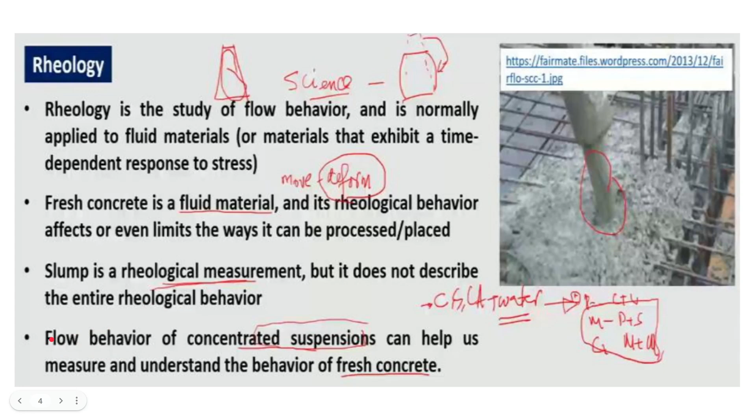And the flow behavior of concentrated suspensions can help us measure and understand the behavior of fresh concrete. So we have to study various aspects such as suspensions and various other parameters such as strain to find out the behavior of flow, as you can see in this picture. So how to measure the flow?

Flow is typically measured using shear parameters of stress and strain rate, which are normally obtained from the direct measurements of torque and flow rate in rheometers. So to study the flow behavior or the rheology, the instrument we use is the rheometer. It gives us various shear parameters such as stress and strain rate. Stress can be found out using the torque, and strain rate can be obtained from velocity and various other parameters.

So viscosity is the representative parameter used to assess the flow behavior and is defined as the ratio of stress to strain rate. We have to see this is not strain but strain rate. So this is viscosity, unlike elastic modulus, which gives us the ratio of stress to strain in solids. Here the viscosity gives the ratio of stress to strain rate.

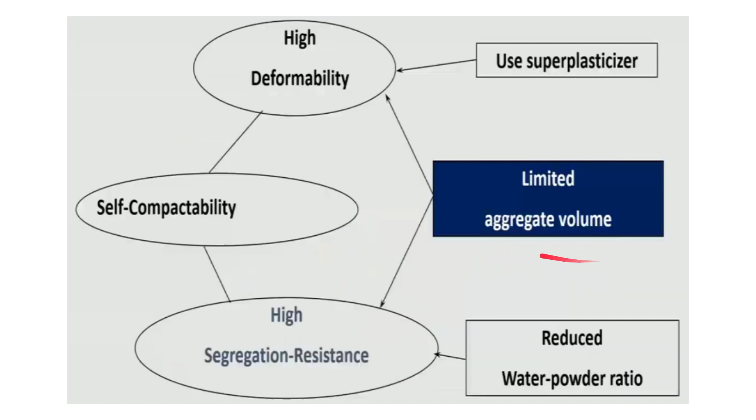So in the last class we studied self-compacting concrete. There we found that for SCC we need both high deformability and high segregation resistance. For high deformability we use superplasticizer, and for high segregation resistance we use reduced water powder ratio. Using both we can obtain the concept of SCC. And for that we need a limited amount of aggregate volume. This is a very important parameter.

So coarse aggregate in concrete is simulated by the large sand particles in this case, and the concept can therefore be extended to concrete. So we need to study blocking tendency, especially near the bars, because there the hole diameter is very low because of lack of space. There are also a few important terms such as water retention.

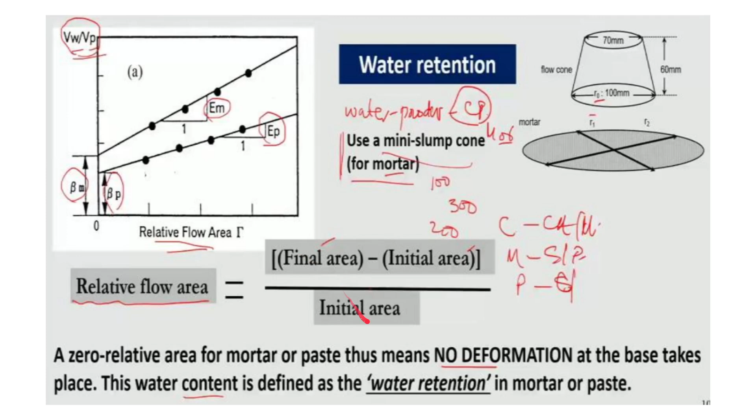That means in the case of zero relative area for mortar or paste, there is no deformation at the base, because the final area and initial area are the same. At this condition, the water content is defined as the water retention in mortar paste. So the maximum water content possible where there is no deformation is called the water retention. They have coined various parameters based on this relative flow area and volume of water and paste. So, the flow behavior of suspension.

Suspension, as we might have discussed, is basically solid particles which are dispersed or flocculated in liquids. They can be either scattered, dispersed, or combined or aggregated in a flocculated manner. So the key factors affecting the flow behavior of suspension are basically two. One is the volume of solid particles, which is termed as Vs, and the second is degree of agglomeration or

flocculation. Vs, the solid particle volume, its increase causes the increase in viscosity, so that's why it is an important factor. The degree of agglomeration or flocculation is mainly caused by interparticle forces. Other influencing factors of flow behavior are temperature and pressure. Liquids with higher viscosities generally have greater temperature sensitivity, and viscosity increases with the increase in pressure, though the changes are minimal at atmospheric pressure.

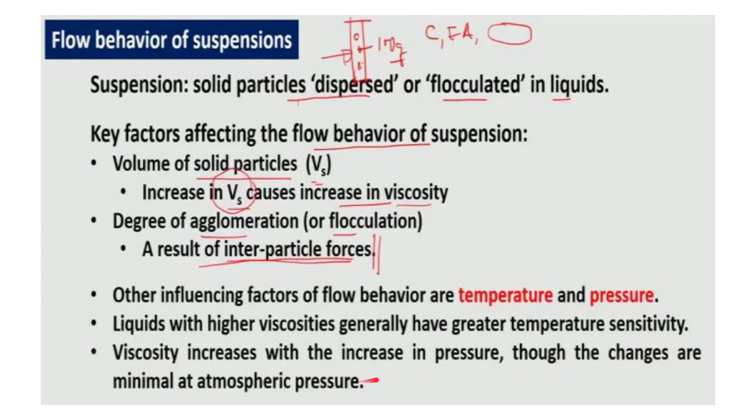Now what are the various types of flow behavior which can be observed? Basically four types of flow behavior have been observed. One is Newtonian, one is Bingham plastic, and both are linear. The Newtonian does not have any initial stress, so it starts from zero, the origin, whereas the Bingham plastic has some initial stress present, so it starts from some value tau naught. In the case of shear thinning, that is pseudoplastic, with the increase in strain rate, the increase in stress decreases. That's why the viscosity decreases and it becomes plastic in nature.

Whereas in the case of shear thickening, with the increase of strain rate, the amount of stress required also increases. So that's why it thickens, so more capacity is required.

So for basic constitutive relations for plastic behavior, these four types of stress-strain rate behavior are obtained for flow. The Bingham model can be modeled as tau equal to tau naught plus eta p gamma dot. For the pseudoplastic power law model, that is shear thinning, tau is equal to k gamma dot to the power n, where tau naught is the initial yield stress, k is the consistency, n is the power index, eta p is the plastic viscosity, and gamma dot is the rate of shear strain.

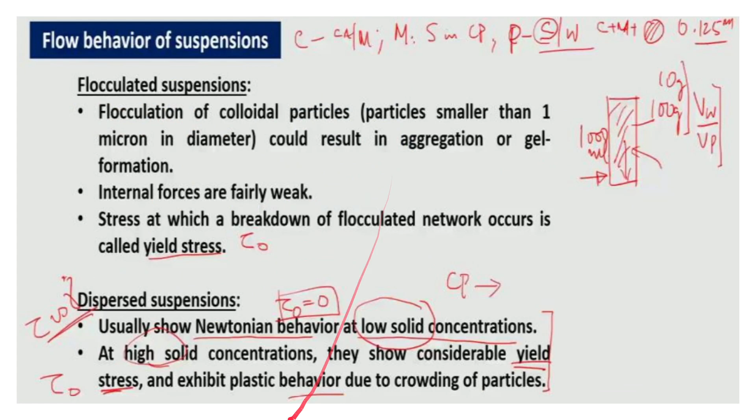So the assessment of flow behavior is normally done using shear rheometers. These are instruments which operate in rotation and measure the torque and rotational speed. There are many types of rheometers, as we will see later, but primarily two fundamental types: the coaxial cylinders and the parallel plates. The sample sits between, and one of the cylinders or plates rotates. Rheometers either control the stress and measure strain rate, or control the strain rate and measure stress.

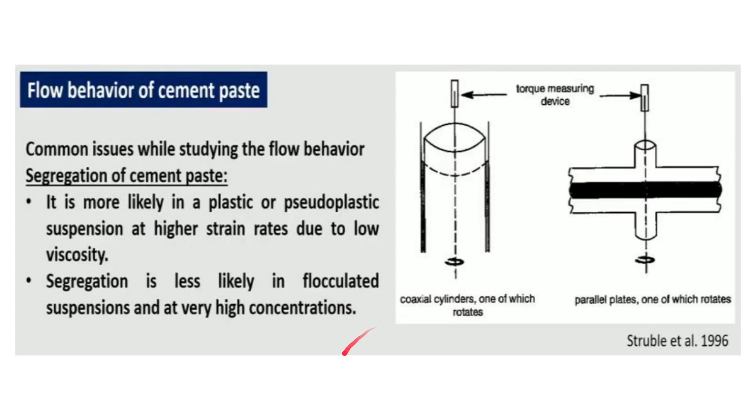So when dispersed using a superplasticizer, cement paste shows Newtonian behavior at low concentrations and plastic behavior at high concentrations. That is what we studied in the last slide here. So in dispersed form, they exhibit Newtonian behavior at low concentration and plastic behavior at high concentration, and it has been found based on experiments by Struble.

So while assessing the flow behavior, there could be some hysteresis in the stress when strain rate is increased from 0 to higher values and brought back to 0 after reaching the peak. This reflects the lack of equilibrium between the microstructure and strain rate, and denotes that the material is undergoing irreversible structural breakdown due to shear.

So because of this hysteresis behavior, it is not coming back to its original shape, and that means some irreversible structural breakdown might have occurred because of the presence of shear. That is the reason why the hysteresis occurs.

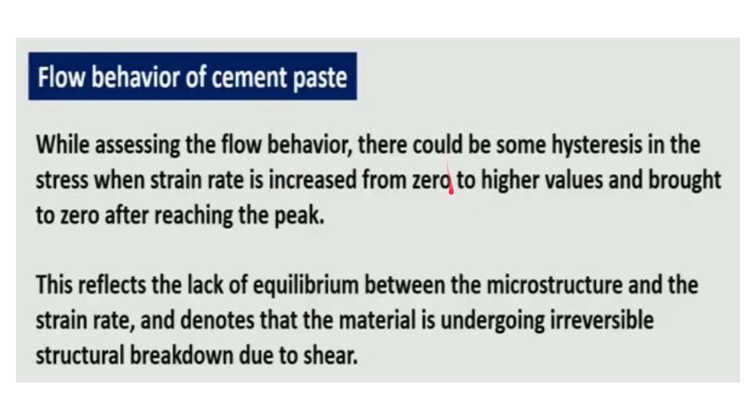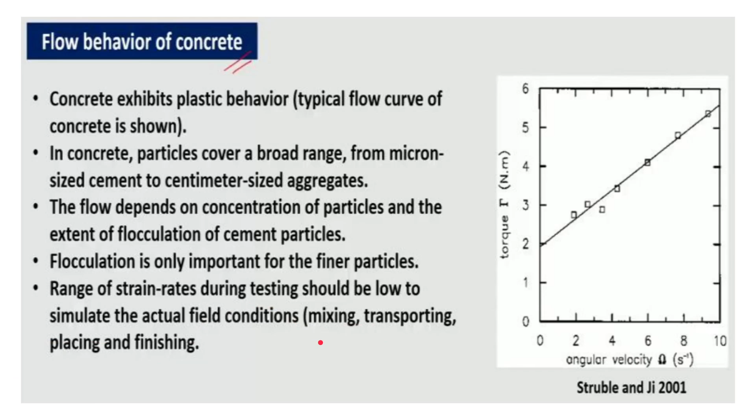The range of strain rates during testing should be low to simulate the actual field conditions, which may occur in mixing, transporting, placement, and finishing. So these are some of the conditions to be noted. Flow behavior must be described using the yield stress and the plastic viscosity due to the Bingham nature. Coarser particles tend to settle due to gravity, and segregation is more likely to happen during shear.

So these factors will occur, and we have to keep them in mind. Slip near the wall of the rheometer could be aggravated due to the larger gap, which is necessary because of coarser particles. So these factors need to be kept in mind.

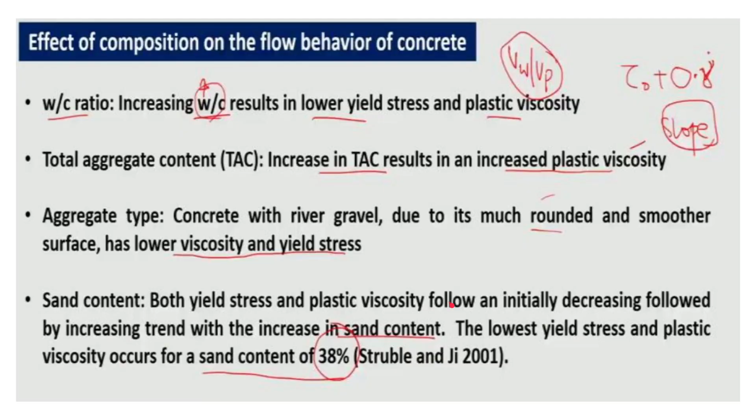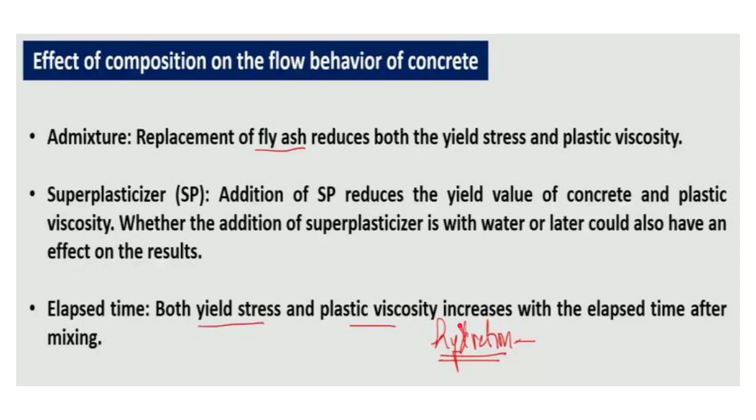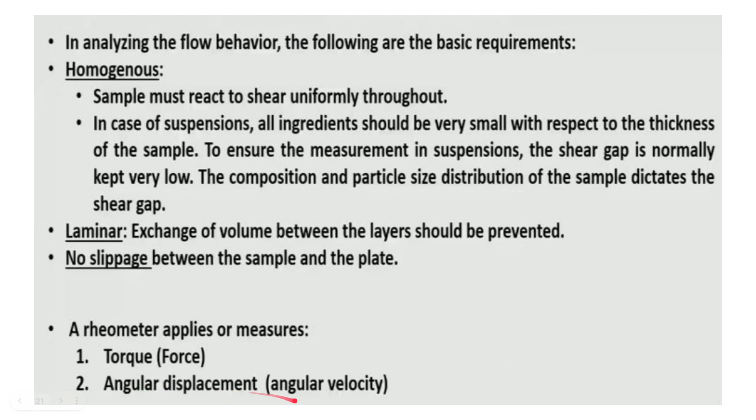And the rheometer basically applies or measures these two. It will either apply torque or force and measure the angular displacement or angular velocity, that is the strain rate, and viscosity, or it will apply the angular displacement or angular velocity and measure the torque or force. So one has to be found using the other.

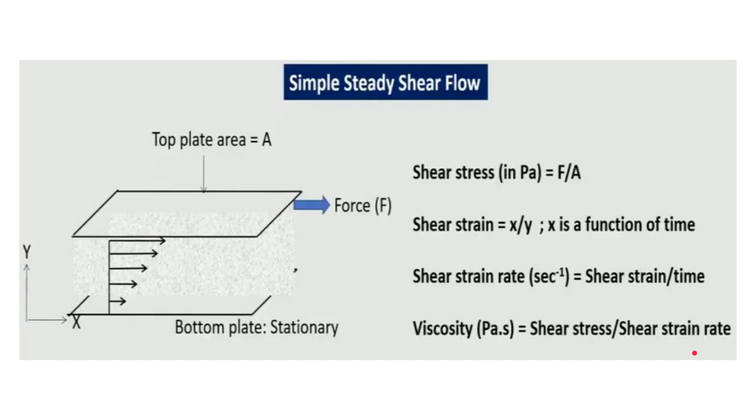Okay, so viscosity is basically shear stress by shear strain rate. Now let us see the torsion flow in parallel plates case.

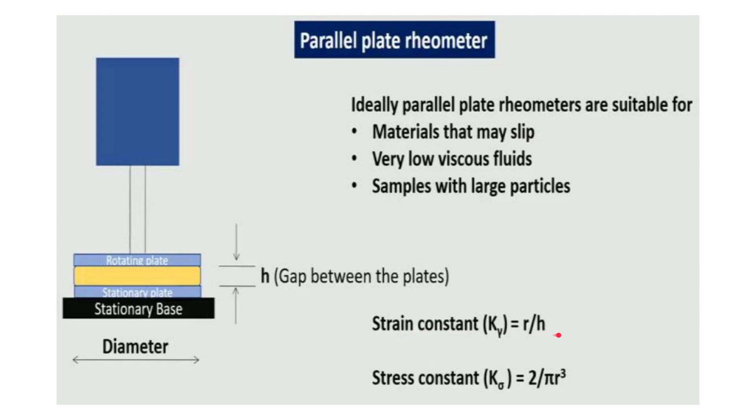Parallel plate rheometers are ideally suitable for materials that may slip, or very low viscous fluids. It can travel fast, and samples with large particles will not have that much problem. So strain constant k gamma is equal to r by h, and stress constant k sigma is equal to 2 by pi r cube.

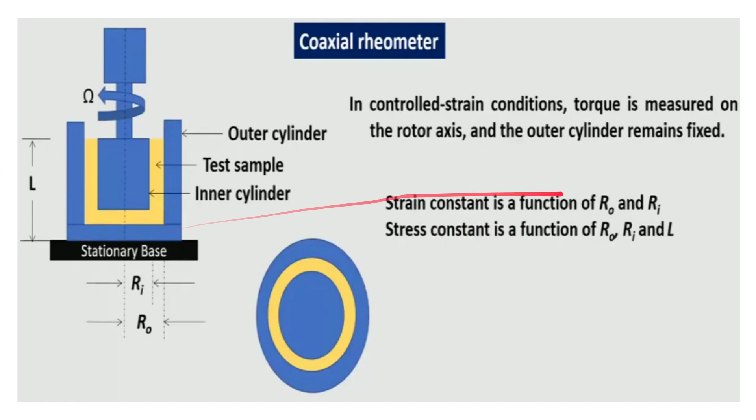This is a stationary base. In control strain conditions, torque is measured on the rotor axis, and the outer cylinder remains fixed. Strain constant is a function of r naught and ri. Stress constant is a function of r naught, ri, and L. So stress takes into account L, the length of cylinder, whereas strain is only r naught and ri. So this is the concept.

Different rheometers exist for testing fresh concrete and mortar. They can be coaxial cylinder type Tattersall apparatus, BML viscometer, BTRHEOM rheometer. These are some of the types of rheometers which are generally used for fresh concrete and mortar testing. We shall go very briefly about them in the coming slides.

Coaxial cylinder type, as we know, is similar in principle to that described in the flow of paste. The tendency of segregation, slip and plug flow are the issues, especially in low viscous concretes.

Typically the gap between the inner and outer cylinder in a coaxial cylinder rheometer must be large compared to the maximum particle size, so that the particle can flow, and it must be small compared to the diameter of the inner cylinder, so that there is no issue of deformation of the machine. If it is too small, then there might be deformation due to the amount of flow.

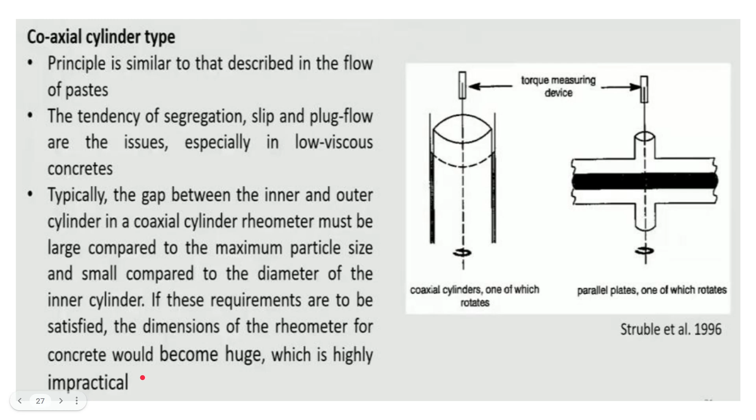So if these requirements are to be satisfied, the dimensions of the rheometer for concrete would become huge, which is highly impractical. So this is one of its anomalies or drawbacks.

Next, let us come to the Tattersall apparatus. This is designed to reduce the tendency of segregation. As you can see, the helical impeller has a vertical axis and rotates in a cylindrical container of fresh concrete having the same axis. Blades reduce the segregation.

Torque gamma exerted on the helical impeller and its angular velocity omega are measured. Stress and strain rate are not directly measured. From the flow curve, two parameters are obtained by linear regression: G, in Newton into meter, and H, in Newton into meter into second, which are analogous to yield value and viscosity respectively.

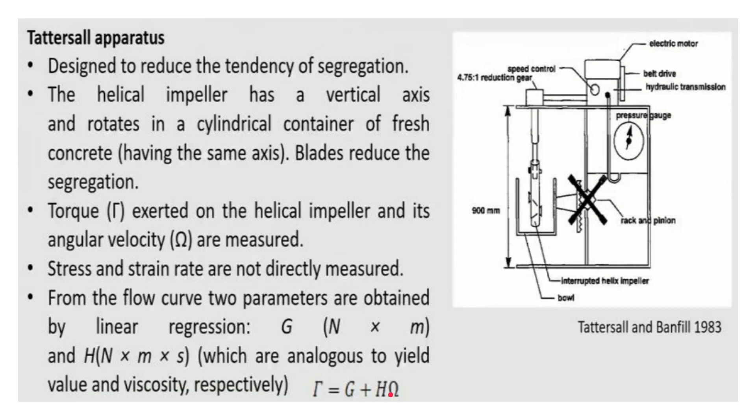So the equation comes to be gamma equal to G plus H omega.

In the case of BML viscometer, this is a coaxial type with vanes on inner and outer cylinder. The equipment measures the torque tau produced on the stationary inner cylinder while the outer cylinder is rotating at various speeds omega. Ribs eliminate the slip between the inner cylinder and concrete.

Changing the measuring speed and the measuring torque are fully computerized and automated. By comparing the torque at a given speed in the first registration sequence and the torque at the same speed but in another registration sequence, the computer assesses whether the concrete is prone to segregation.

So basically, if the speed is constant, the torque should also be constant. But after changing the registration sequence, if the torque gets changed for the same speed, mainly if it has become low, that means segregation has occurred in concrete. So using that, we can check whether the concrete is prone to segregation. That is the use of the BML viscometer.

And lastly, let us go to the BTRHEOM viscometer. It is basically a rotational rheometer that utilizes a parallel plate geometry. Both the plates are vaned, so slip and plug flow are controlled.

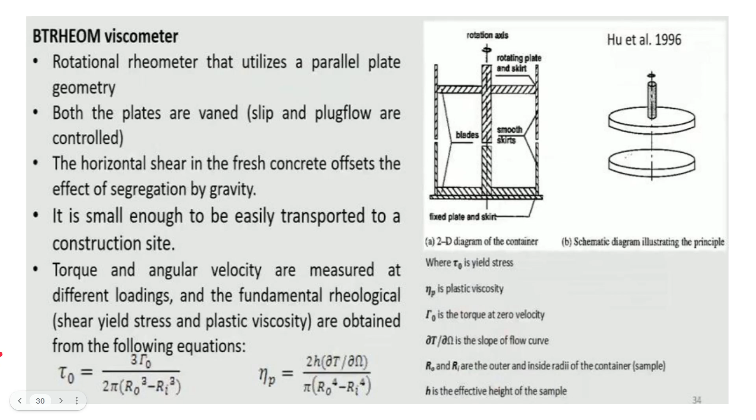With this, we have briefly gone through rheology. This much is sufficient for our purpose. For more, you can go through various books and literature and find out in-depth detail about these techniques.

So now let us go to one special type of concrete, the fiber reinforced concrete. So development of fiber reinforced concrete, or FRC as it is termed.

FRC is the acronym of fiber reinforced concrete. It attempts to address the following two deficiencies of cement based composites: one is relatively low tensile strength, and second is low energy consumption capacity, which is also called toughness.

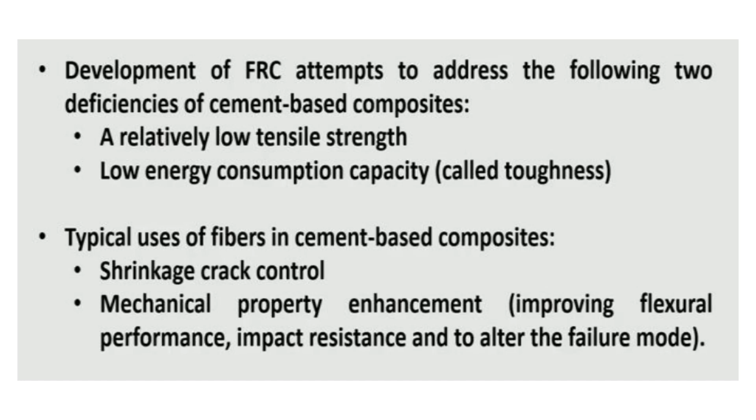This typically uses fibers in cement based composites for shrinkage, crack control, mechanical property enhancement, improving flexural performance, impact resistance, and altering the failure mode.

So in the case of matrix concrete, two types of fibers can be used: one is continuous fibers, which are straight lines, and one is discrete short fibers, which are in random directions.

If you compare fiber reinforcement and conventional reinforcement, fibers are generally distributed throughout concrete, whereas reinforcing bars or wires are placed only in predetermined locations. Fibers are relatively short, discrete, closely spaced, and randomly distributed throughout the matrix. Presence of fibers in concrete modifies the properties of concrete per se.

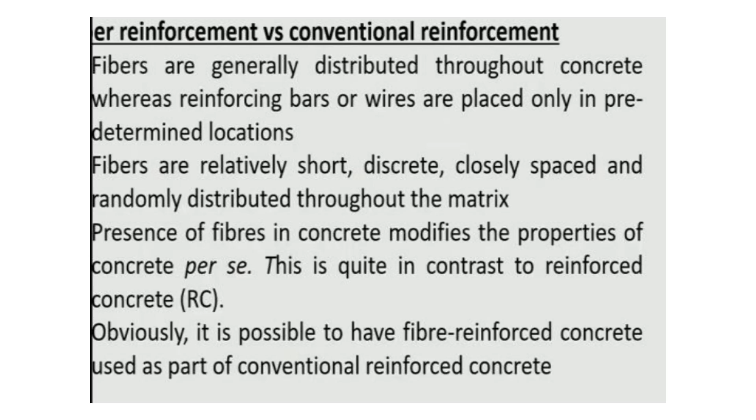This is quite in contrast to reinforced concrete, RC. Obviously, it is possible to have fiber reinforced concrete used as a part of conventional reinforced concrete. So these are the advantages of fiber reinforcement over conventional reinforcement.

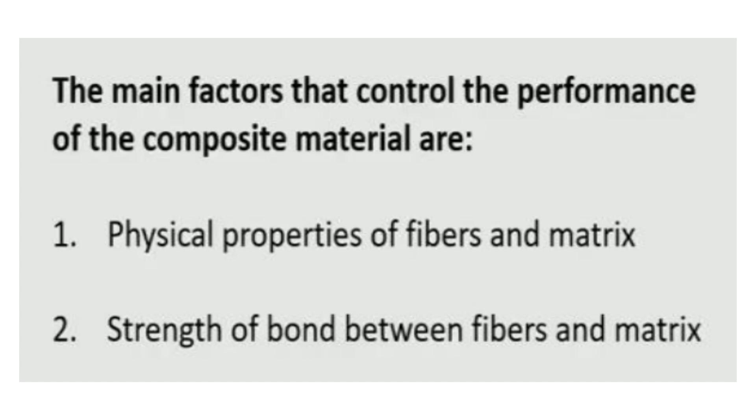The main factors that control the performance of the composite material are basically the physical properties of fibers and the matrix, and secondly the bond strength between fibers and matrix. These two properties are the main factors which control the performance of composite material, and for this we have developed a term called fiber volume ratio.

The fiber volume ratio is basically the ratio between fiber volume and the total volume of FRC. At a low fiber volume, the addition of fibers contribute mainly to the toughness, and at a high VF (fiber volume), the tensile strength of matrix can be enhanced and the failure mode can be changed.

These are the ways of using fiber reinforced concrete and its various applications. The properties of the matrix influence the bond with the fibers and the mechanical properties of FRC. FRC can be modified using mineral admixtures such as fly ash, slag, silica fume, metakaolin, etc. This increases its applicability.

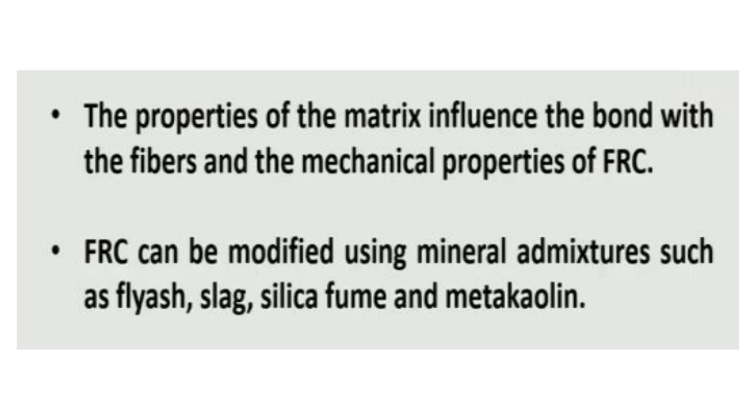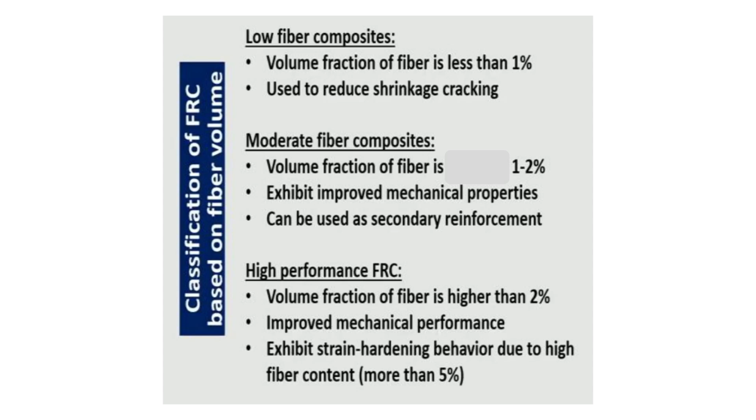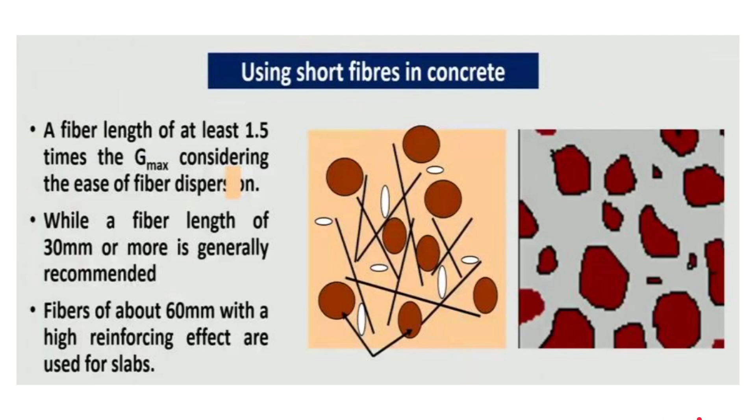Using short fibers in concrete, a fiber length of at least 1.5 times the maximum size of aggregate can be used, considering ease of fiber dispersion, while a fiber length of 30 millimeters or more is generally recommended. Fibers of about 60 mm with a high reinforcing effect are used for slabs. These are criteria for how short fibers can be used.

So what are the types of fibers? Fibers can be made from steel, plastic, glass, natural materials such as wood, cellulose, etc. They are available in a variety of shapes, sizes, and thicknesses. They may be round, flat, crimped, and deformed. The steel, glass, synthetic, and natural fibers with different lengths and shapes have been shown here in this figure.

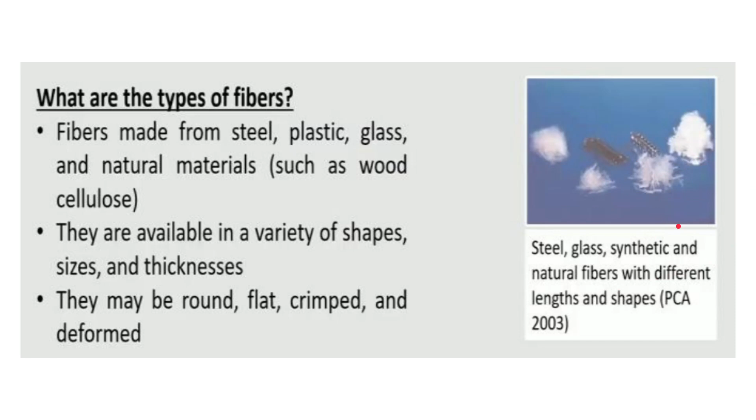They may be round, flat, crimped, deformed, with a variety of shapes, sizes, and thicknesses. These are some examples of typical fibers: this is a steel fiber, these are polyethylene fibers. Various types of fibers are shown here.

The characteristics of commonly used fibers: the diameter D is between 0.05 to 0.5 millimeter. The length L is basically from 5 to 60 millimeter, and the aspect ratio, that is L by D, is around 100. These are some of the characteristics of commonly used fibers.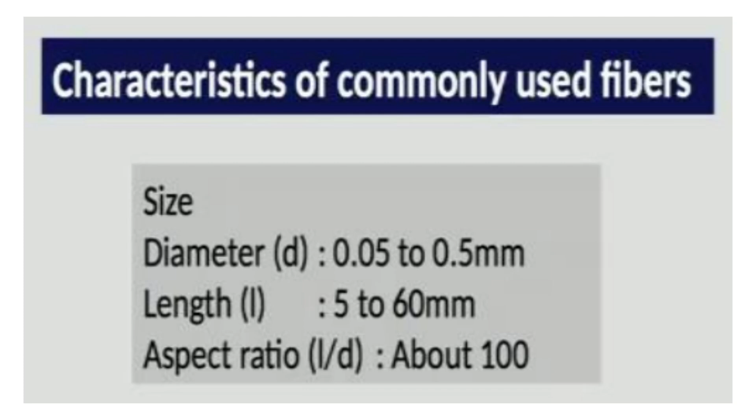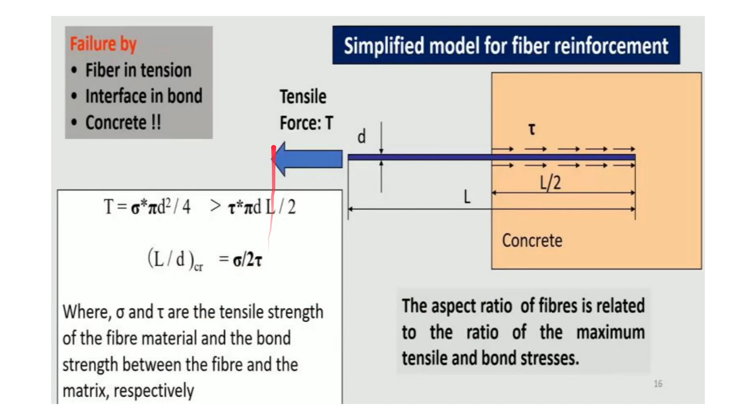So more is the aspect ratio, more is the tensile force. More is the tensile force given, greater will be the aspect ratio. Also higher will be the bond stress, lesser will be the aspect ratio. So that's why the critical aspect ratio is mainly dependent on the bond stress as well as the tensile force.

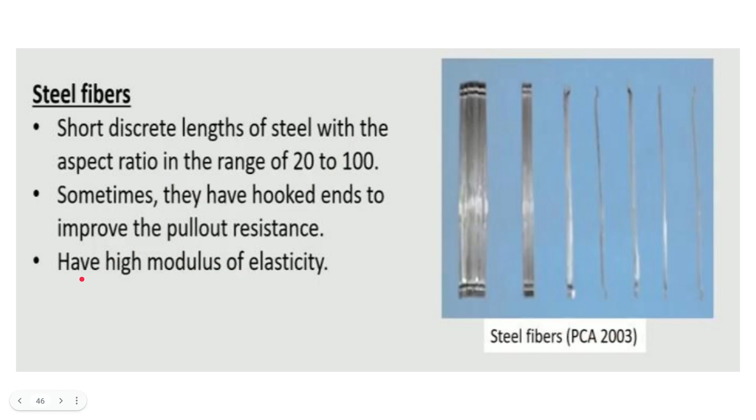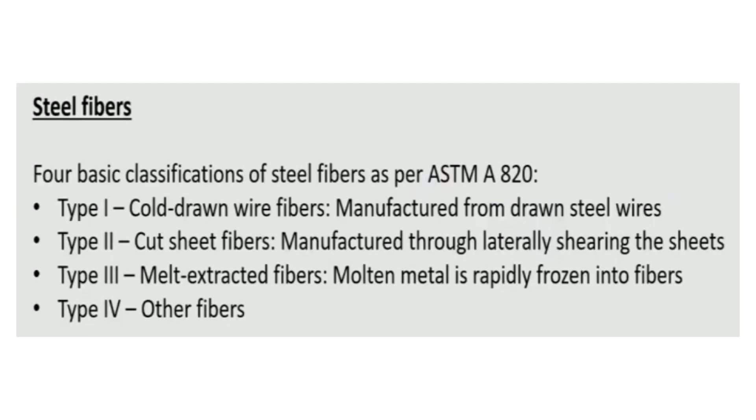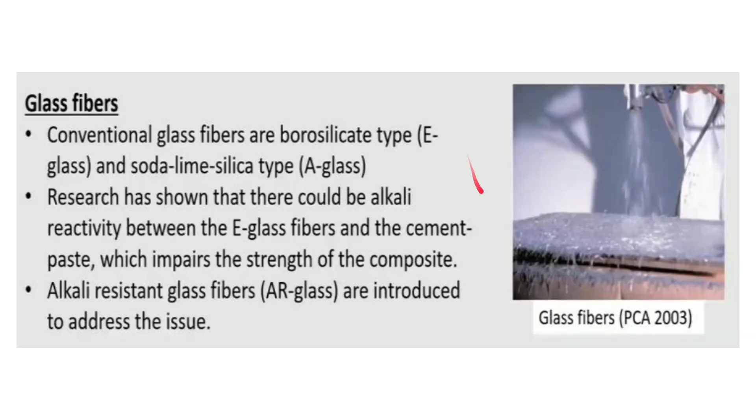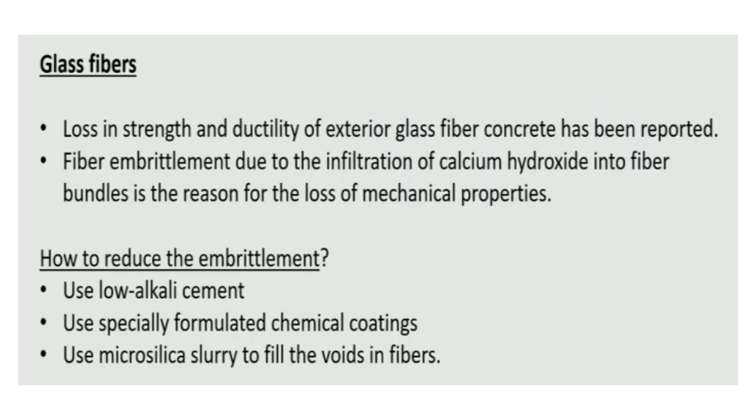So it has been found that glass fibers result in loss in strength and ductility over time, and that is basically because of fiber embrittlement due to the infiltration of calcium hydroxide into fiber bundles, which results in loss of mechanical properties. This reduction in mechanical properties due to embrittlement can be decreased to a great extent by using low alkali cement, specially formulated chemical coatings, microsilica slurry for filling the voids in fibers, etc.

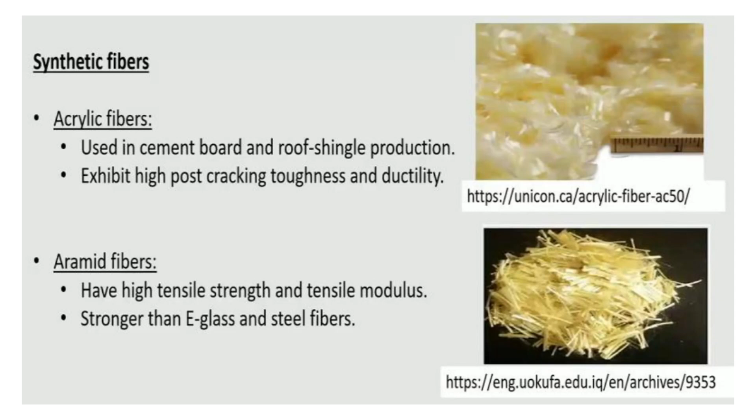They exhibit high post-cracking toughness and ductility. In case of aramid fibers, they have high tensile strength and tensile modulus. They are stronger than E-glass and steel fibers. So these are some of the characteristics of the aramid fibers. Then

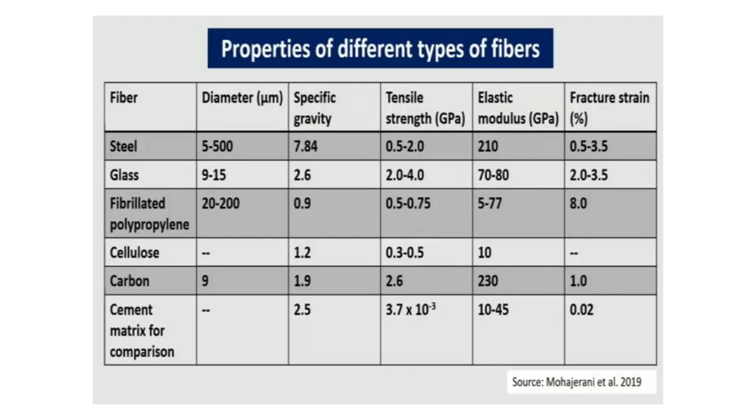So then let us come to properties of different types of fibers. As you can see, these are the various fibers and the various parameters they have given here based on literature. So now let us go into the durability of fibers in concrete.

As we all know, the steel is protected from corrosion through the formation of an oxidation film on the steel surface, which has a high pH. This film prevents the steel from coming in direct contact with water and air, and hence steel fibers do not corrode, which is very obvious and very trivial.

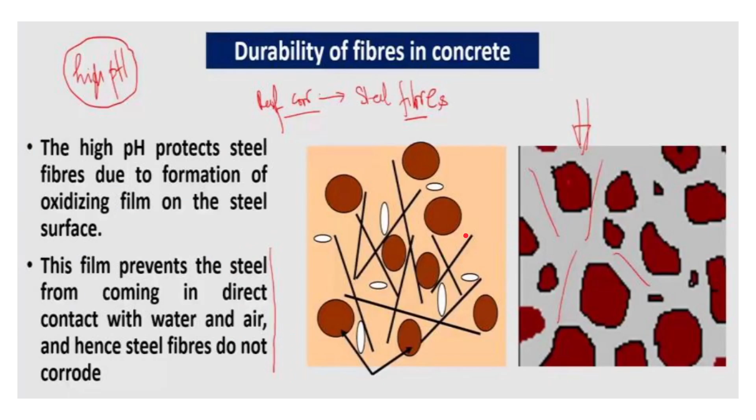So in steel fiber reinforced concrete, addition of fibers reduces the workability of concrete. That is one of its drawbacks. So for the same consistency, cement content, water content, and sand to aggregate ratio all need to be increased compared to plain concrete. It hampers mixing, transportation, placing, and consolidation. So that has to be kept in mind because it hampers all.

The coefficient of variation of compressive strength is similar to that of normal concrete. Compressive and tensile strengths do not change much with the fiber content. So that is also one of the parameters.

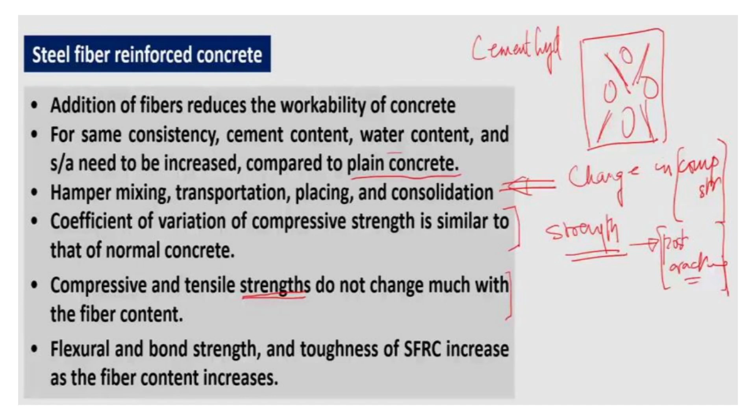And flexural and bond strength and toughness of SFRC also increase as the fiber content increases. All those values increase in the case of steel fiber reinforced concrete as the amount of fiber content increases. The mix should be cohesive enough to hold the fibers without segregation.

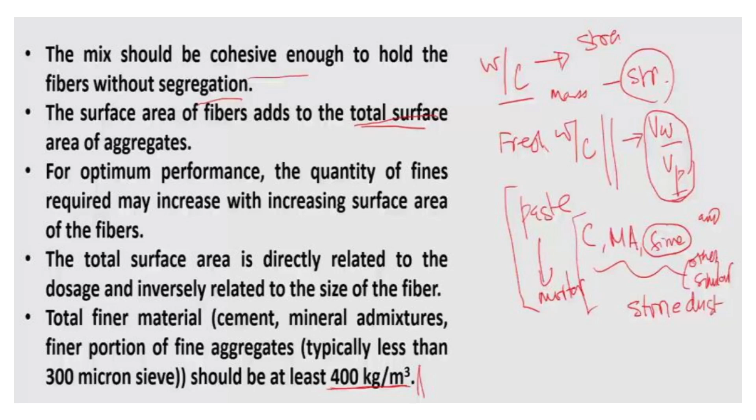The surface area of fibers adds to the total surface area of aggregates. For optimum performance, the quantity of fines required may increase with increasing surface area of the fibers. The total surface area is directly related to the dosage and inversely related to the size of the fiber. And total finer material, cement, mineral admixtures, and the finer portion of fine aggregates, typically less than the 300 micron sieve, should be at least 400 kg per meter cube. So these are some of the criteria which have to be used.

For the mix to be efficient for the fibers, the grading curve, that is the graph of sieve size and percentage passing of aggregates, coarse and fine together, should be polarized towards the finer side in order to increase the carrying capacity. The combined grading curve of coarse and fine aggregates down to 75 micron size should be checked for getting smooth grading. It is preferable to use natural fine aggregate. If it is not available, the available fine aggregate can be modified by combining crushed sand or mixing a small percentage, about 4 to 8% of crusher fines, to improve the continuous grading.

As the number of fibers in a unit volume of concrete increases, the spacing between the fibers reduces. That is obvious. This poses a limit on the maximum size of coarse aggregate and its percentage fraction in the mix. The maximum size of aggregate and the proportion of coarse aggregate may suitably be reduced depending on the dosage and diameter of fiber.

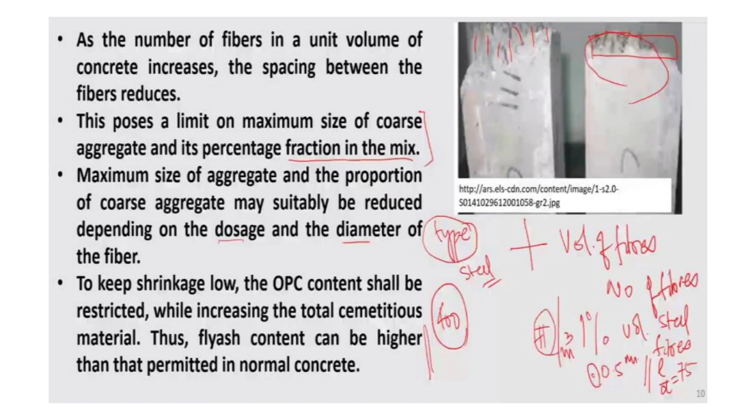For keeping the shrinkage low, the OPC content should be restricted while increasing the total cementitious material. Thus, fly ash content can be higher than that permitted in normal concrete. So these are other factors that need to be kept in mind. Keep water content to a minimum. Water demand increases linearly with fiber content.

For each fiber percent, an increment of as much as 20 kg per meter cube may be required. Water content shall normally be in the range of 140 to 180 kg per meter cube of concrete. To minimize water content, admixtures such as air entraining, water reducing, and high range water reducing admixtures may be used. Typical dosages of superplasticizer, naphthalene or melamine based, are in the range of 0.4 to 1.4% of cementitious content.

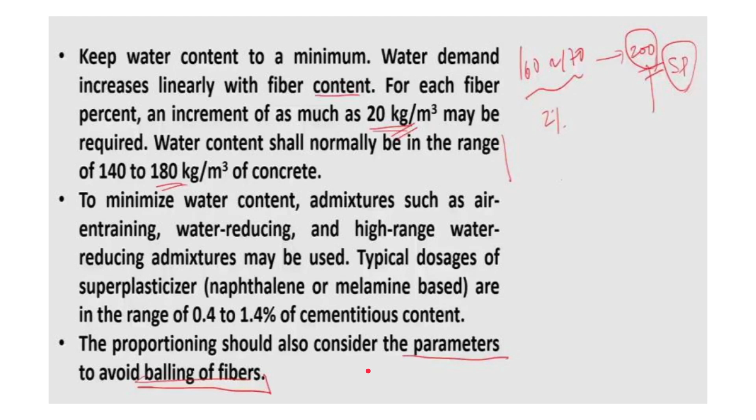So the shape, size, and content of steel fibers may be determined considering the required strength and deformation characteristics of the steel fiber reinforced concrete. A steel fiber reinforced concrete should be proportioned keeping the water content at a minimum while meeting the required performance in terms of workability, etc. High unit water content and sand aggregate ratio could induce bleeding and segregation, and would hamper mixing, transportation, placing, and consolidation.

So higher water content and sand aggregate ratio results in bleeding and segregation. So that is one of the issues. And if there is lower water content, then that will lead to improper hydration. So that is the other problem, and also it will not give proper workability. So both are issues. It has to be workable and also not result in bleeding and segregation.

So considerations for fiber length. It should be sufficiently long compared to the maximum aggregate size to have the desired effect. So it should be at least 1.5 times the maximum size of aggregates. It should be about 60 mm for high reinforcement effect for slabs. Sorry, a length of 30 mm or more is recommended generally.

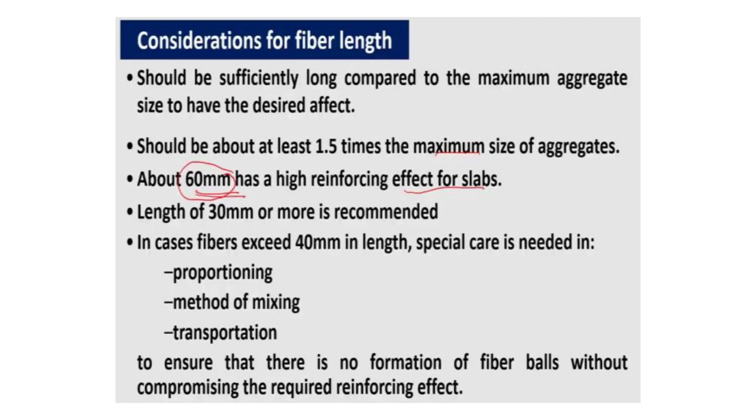In cases where fibers exceed 40 mm in length, special care is needed in proportioning, method of mixing, transportation, etc. to ensure that there is no formation of fiber balls without compromising the required reinforcing effect. If fiber content is between 0.5 to 2%, normal mixing methods may be used. The concrete should be thoroughly mixed to get a homogeneous uniform mix.

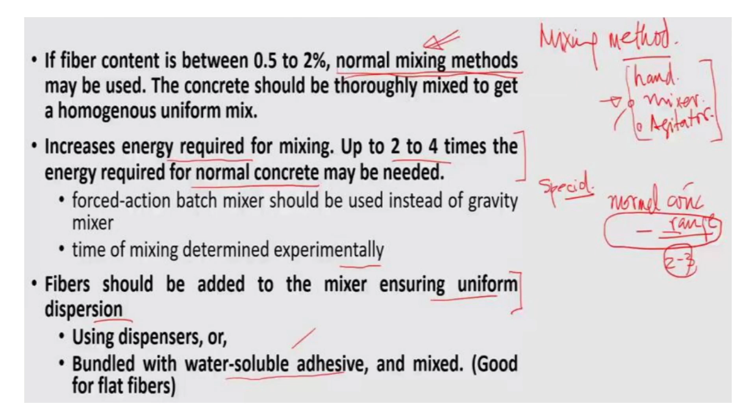Fibers should be added to the mixer ensuring uniform dispersion, using dispensers or bundled with water soluble adhesive and mixed, which is good for flat fibers basically. So all those techniques can be used. When fibers are added in an agitating truck, the concrete should be mixed at high speed. Mixing time for FRC can be 15 to 25% higher compared to concrete without fibers.

The variations in the proportions of coarse aggregate in a sample of known size denote the mixing efficiency in fiber reinforced concrete. For each FRC job, the optimum time for uniform mixing should be found by trials, and it may change with ingredients, especially fibers. Thus it should be checked very frequently.

So the mixing time will also change with the working rpm of the mixer and with wear of the blades, to ensure that the fibers do not form balls. We have to keep in mind that longer fibers have a greater tendency to wrap around lumps and form balls.

Chances of balling are higher with higher dosages of fibers, and also higher with higher aspect ratio. So more is the L by D ratio, more will be the balling, and also with higher dosage because of the increase in volume. So harsh mixes, not fluid enough or not workable enough, take longer time to mix the fibers without balling, okay.

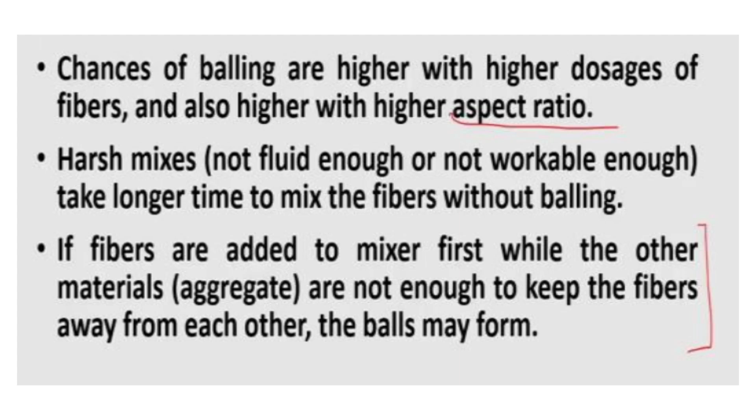So if the harsh mix basically is not fluid enough, it takes longer time for mixing, okay, and that's why without balling it will also take longer time. Also if the fibers are added to the mixer while the other materials are not enough to keep the fibers away from each other, okay, then also the balls may form. So we have to keep into account everything.

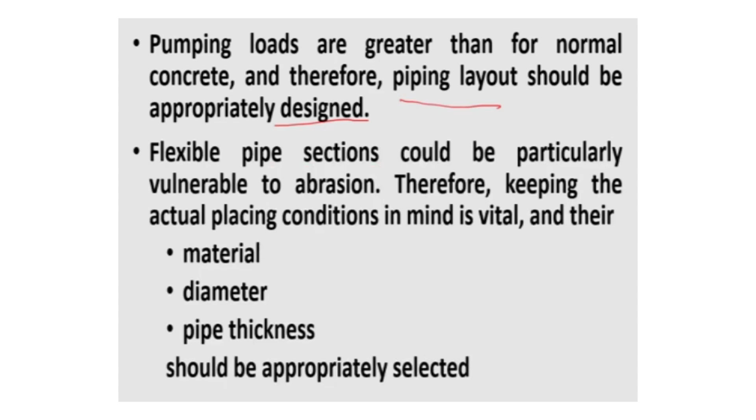So pumping loads are greater than for normal concrete because of the presence of steel fibers, and therefore the piping layout should be appropriately designed, okay. Flexible pipe sections could be particularly vulnerable to abrasion, okay. Therefore keeping the actual placing conditions in mind is vital, and their material, diameter, pipe thickness, all should be appropriately selected. Then only it will be useful, okay.

So checking the homogeneity of fiber dosage, okay. The content of fiber shall be checked from samples obtained from fresh concrete. Each fresh concrete sample will be placed over a 5 mm sieve and washed with water to remove the fine content. From the remaining mass of aggregates and fibers, the fibers are to be separated manually, dried, and weighed.

The average weight of fibers obtained is used to determine the nominal fiber dosage, which shall not be less than 90% of the specified fiber dosage. For steel fibers, a magnet or an electromagnet can be used to extract the fibers. The content of fibers can also be estimated in hardened concrete by taking cores and crushing them.

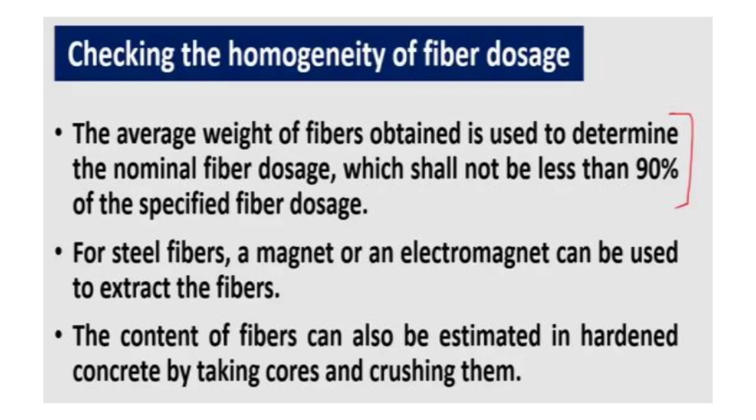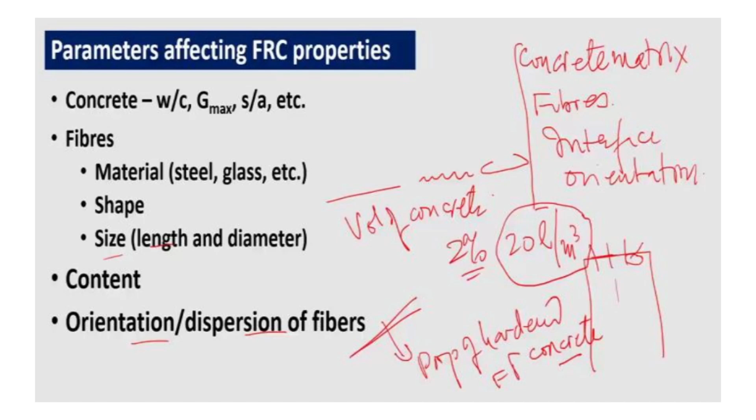So now let us see the parameters which affect the FRC properties. Concrete is mainly affected by water cement ratio, maximum size of aggregate, sand by aggregate, total aggregate content, etc. Fibers mainly depend on material, that is steel, glass; shape, size, aspect ratio; content, orientation, fiber dispersion, etc. So shape, size, and content of steel fibers are determined according to the required strength and deformation characteristics of SFRC.

Steel fibers are either mixed in the mixture with other materials or are sprayed or added at the end in the agitator truck. Shape and size: the length ranges between 20 and 60 mm. Diameter ranges between 0.3 and 0.9 mm. And the aspect ratio L to D ranges between 30 and 100. Fiber content ranges between 0.5% and 2.0% by volume, which is equivalent to 40 to 160 kg per meter cube by weight.

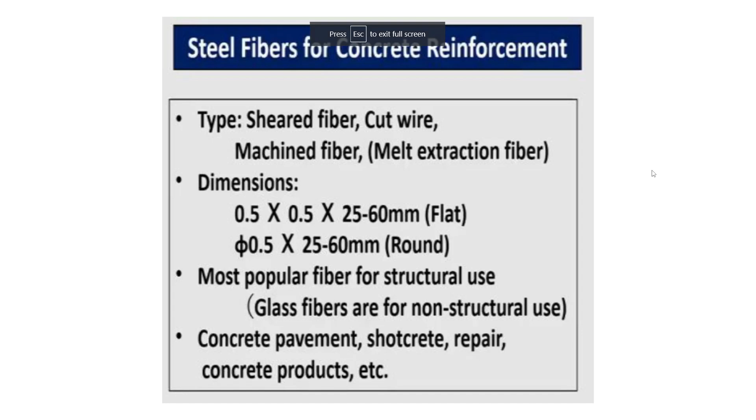Okay, so the steel fibers can be sheared fiber, cut wire, machined fiber, melt extraction fiber, etc. And the dimensions can basically be 0.5 by 0.5 by 25 to 60, flat. That is a square section, and this is length, so it is basically flat. And round, that has 0.5 diameter into 25 to 60 length.

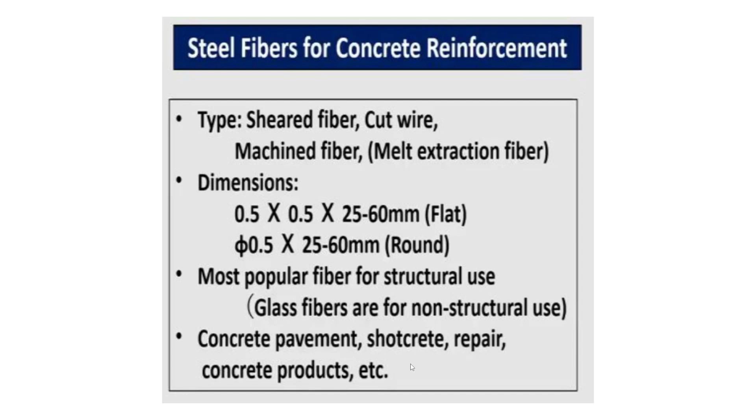So the most popular fiber for structural use is the steel fibers, as we discussed, and glass fibers are basically for non-structural use. Concrete pavement, shotcrete repair, concrete products, etc. are some of the applications. Properties of SFRC: in SFRC, the steel fibers may be assumed to carry tensile stresses only after cracking of the concrete phase. Thus the tensile strength of SFRC may be taken to be the cracking or tensile strength of the matrix concrete.

Addition of fibers may not lead to substantial increase in the compressive or tensile strength, though the post cracking behavior is a completely different story. So we have to take that. Whereas the flexural and bond strength and especially toughness of SFRC increase as the fiber content increases, the compressive and tensile strengths do not change considerably with the fiber content.

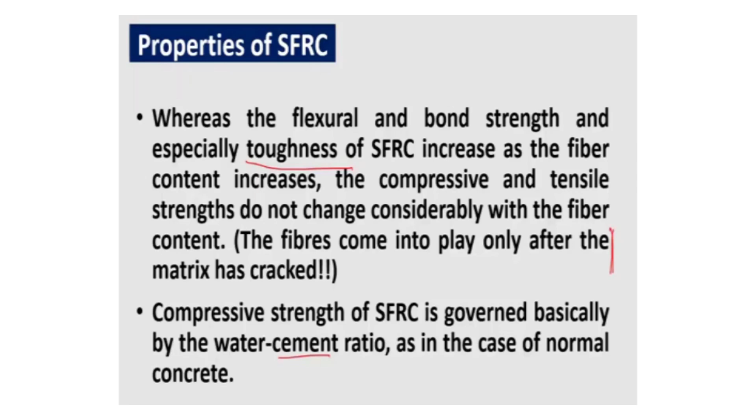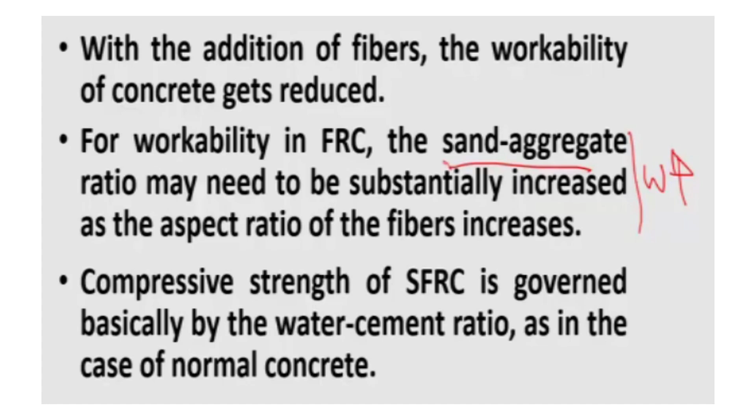The fibers come into play only after the matrix has cracked. Compressive strength of SFRC is governed basically by the water cement ratio, as in the case of normal concrete. With the addition of fibers, the workability of concrete gets reduced. For workability in FRC, the sand aggregate ratio may need to be substantially increased as the aspect ratio of the fibers increases. Improve strength in tension, flexure, and shear.

Improve crack resistance, ductility, and impact resistance. High crack arresting capability reduces crack width and improves fatigue strength. High compressive toughness at compressive failure. High flexural toughness in bending, and high resistance to impact and explosive loads. Fiber cement bond properties.

Characterizing the interfacial bond properties and fiber debonding plays an important role in FRC. Two analytical approaches interpret the material properties for fiber debonding. Basically there are two types of criteria: one is the stress based criterion and one is the energy release rate criterion. In the stress based criterion, debonding of the fiber from the matrix will take place when the maximum shear stress at the interface reaches a critical value.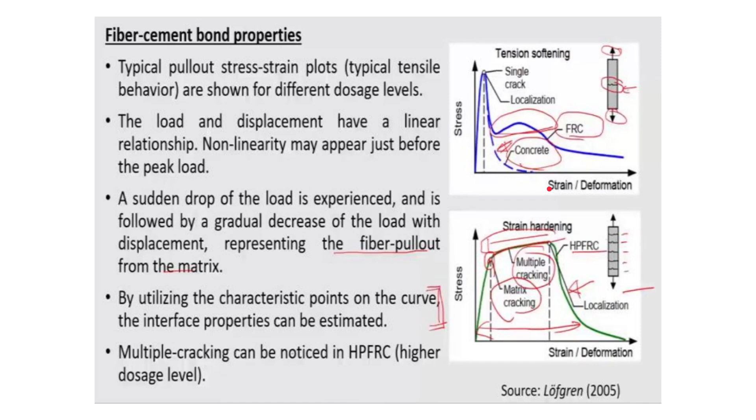In the case of the single crack, that is fiber reinforced concrete, they follow strain softening. That means after reaching the peak load, with increase in strain the strength decreases directly. Incorporation of fibers into concrete improves the tensile behavior, including strength, toughness, and failure mode. Two basic categories: strain softening and strain hardening. Strain softening occurs in the case of low volume fiber fraction, not exceeding 1%. Area under the deformation curve is higher in FRC.

Usually a specimen is characterized with a single macro crack. As you can see here, only one crack will occur, and by this the specimen is characterized. In the case of strain hardening behavior, the second case, a higher dosage level of fiber reinforced concrete is used. So strain hardening behavior occurs at higher dosage level.

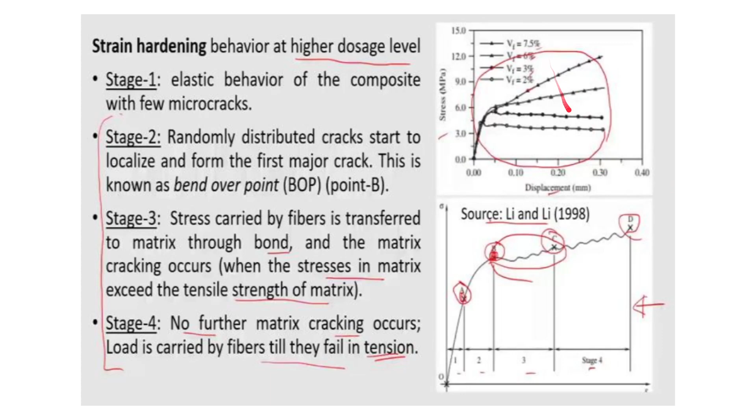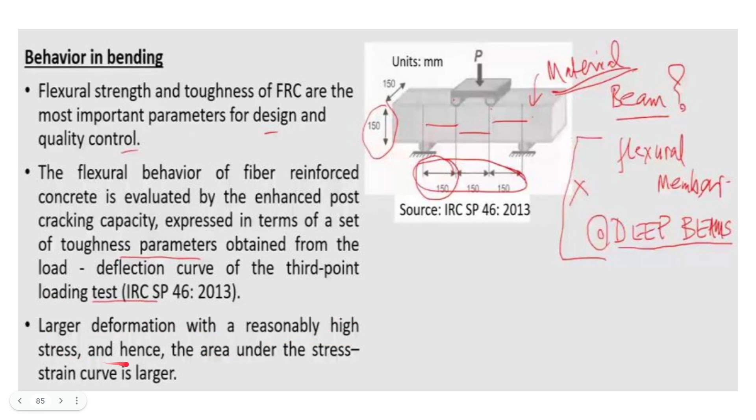Larger deformation with a reasonably high stress, and hence the area under the stress strain curve is large. In the behavior in bending, the area under the load deflection curve can be used as an index to estimate the energy absorbing capacity or toughness of the material.

Increased toughness means improved performance in resisting fatigue, impact, and impulse loading. Improved toughness also leads to better ductility. So that is the use of using fiber reinforced concrete.

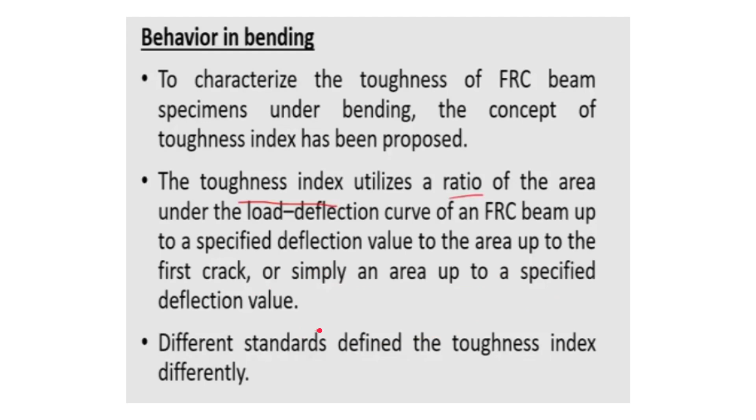To characterize the toughness of fiber reinforced concrete beam specimens under bending, the concept of toughness index has been proposed. The toughness index utilizes a ratio of the area under the load deflection curve of an FRC beam up to a specified deflection value, to the area up to the first crack, or simply an area up to a specified deflection value. Different standards define the toughness index differently.

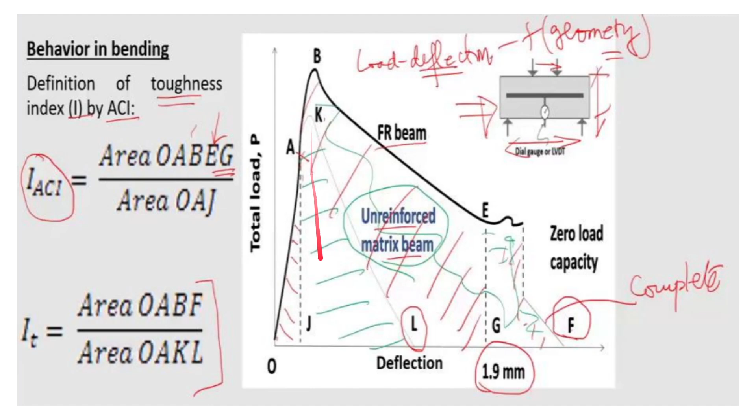As per ACI, toughness index is equal to area of OABEG, that is up to 1.9 mm deflection, divided by the area up to the first crack, that is OAJ. Or it can also be defined as area of OABF divided by area of OAKL, that is for the normal concrete - area of the fiber reinforced concrete divided by area of normal concrete. So both can be done.

In the case of Japan Concrete Institute, according to them, toughness is measured by the area under curve till L by 150 deflection, that is span by 150.

So these are some of the ways through which we can find out the flexural and other toughness ratios.

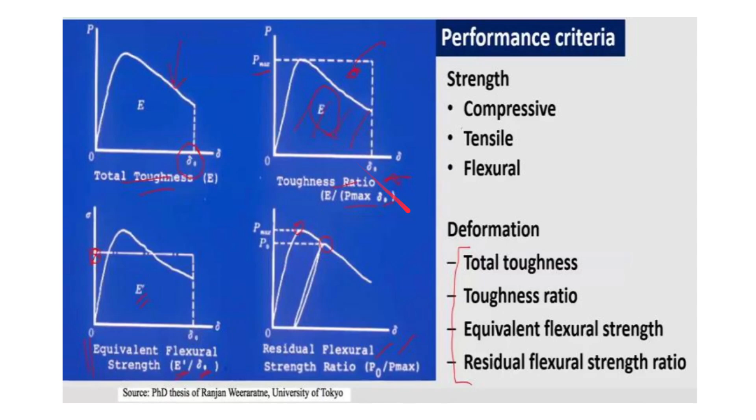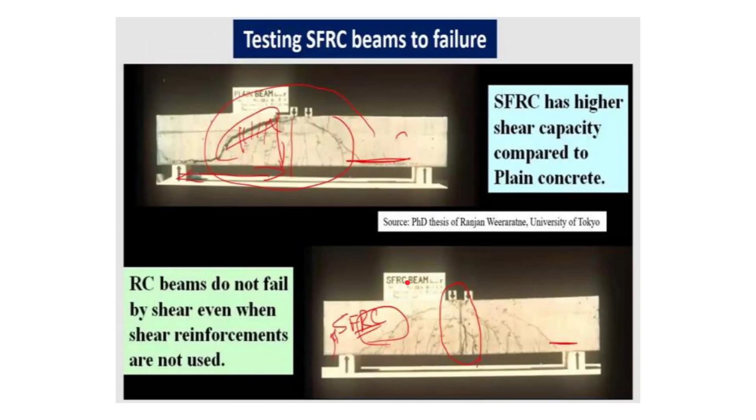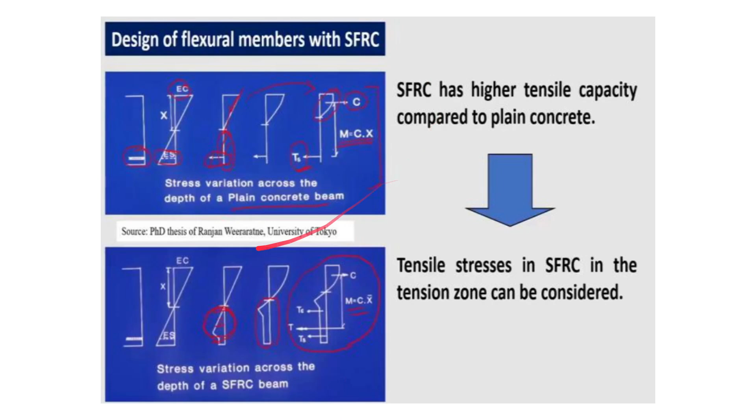If you see the design of flexural members with SFRC, you will see that compared to plain concrete, SFRC beam has higher tensile capacity. Tensile stresses in SFRC in the tension zone can be considered - so we can take the tension zone and consider the tensile capacity.

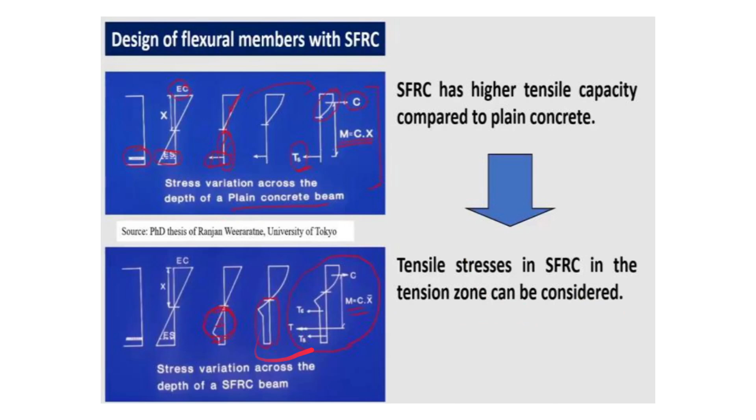Applications of FRC: they can be applied to pavements and tunnel lining with reduced thickness. Tunnel lining, in case of concrete without reinforcing bars, by increasing the fiber content.

This increases the concrete's resistance to freezing and thawing, thereby increasing its durability, and increases the shear capacity of members.

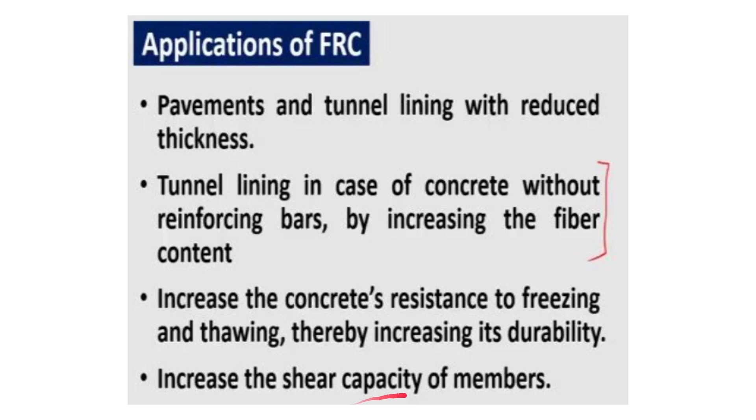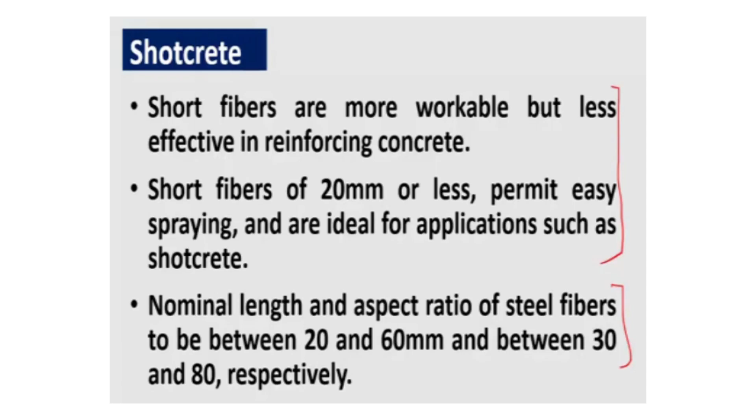Now, shotcreting - how can we use fibers in shotcrete? Short fibers are more workable but less effective in reinforcing concrete. Short fibers of 20 mm or less permit easy spraying and are ideal for applications such as shotcrete. Nominal length and aspect ratio of steel fibers should be between 20 and 60, and between 30 and 80 respectively.

So with this we come to the end of this week's course content. Now let us go to the solved problems.

First question: in the context of rheology, consider the following statements. Statement 1, rheological behavior of fresh concrete affects the way it can be processed and placed - which is true, as we discussed initially. Statement 2, rheology is the study of flow behavior of materials exhibiting a time dependent response to stress - that is also true, since the response is basically in terms of shear stress and shear strain rate, obtained by torque and viscosity. So both statements are true, and the first option is correct.

Second question: in the context of rheology, consider the following statements. Statement 1, behavior in fresh concrete can be obtained from direct measurements of torque and flow rate using rheometers - that is correct, since flow behavior mainly gives direct measurement of torque and flow rate. Statement 2, viscosity, which is the representative parameter for assessing flow, is defined as a ratio of stress to strain. This is not correct, because viscosity is the ratio of stress to strain rate, not strain alone. So statement 1 is true and statement 2 is false, meaning the second option is correct.

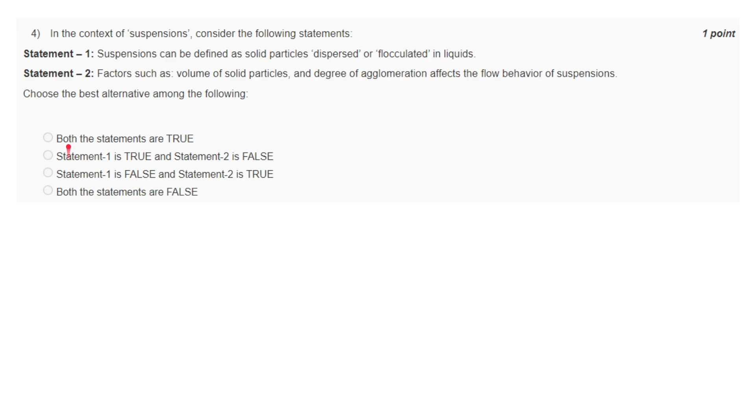Fourth question: in the context of suspensions, consider the following statements. Statement 1, suspensions can be defined as solid particles dispersed or flocculated in liquids - that is true. Statement 2, factors such as volume of solid particles and degree of agglomeration affect the flow behavior of suspensions - that is also true. So both statements are true, therefore the first option is correct.

Fifth question: in the context of flow behavior of concrete, consider the following statements. Statement 1, increasing the water to cement ratio lowers the yield stress and plastic viscosity of concrete - that is true. Statement 2, increase in total aggregate content (TAC) results in decreased plastic viscosity of concrete - this is false, because increasing total aggregate content will increase plastic viscosity, not decrease it. So statement 1 is true and statement 2 is false, meaning the second option is correct.

Sixth question: consider the following deficiencies in cement-based composites - 1, relatively low tensile strength; 2, low flexural performance; 3, shrinkage cracking; 4, low energy absorption capacity. Which of these can be improved by adding fibers to cement-based composites? Fiber reinforced concrete can help increase relative tensile strength, increase flexural performance, reduce shrinkage cracking, and also increase energy absorption capacity, or toughness.